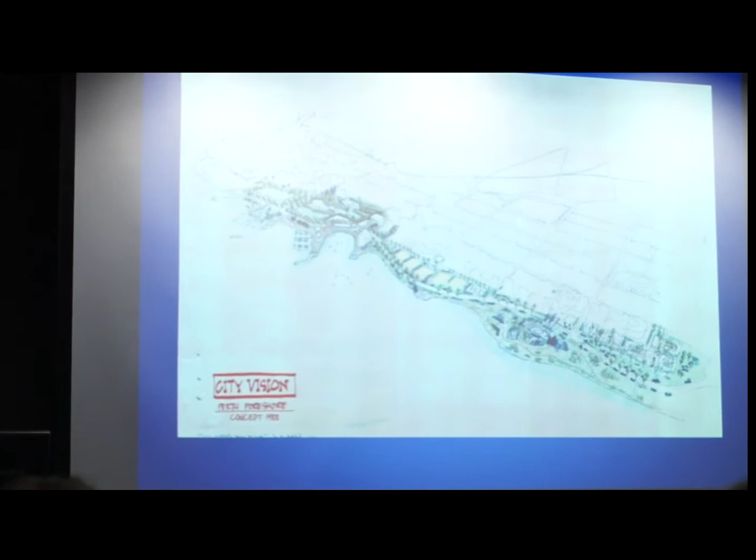I should say that I'm not here as an advocate of the current government scheme, because City Vision's been around for a long time and started the idea of doing something on the foreshore way back in 1988. Now, you may not like that, but one of the things we were involved in was the idea that the foreshore may have some development.

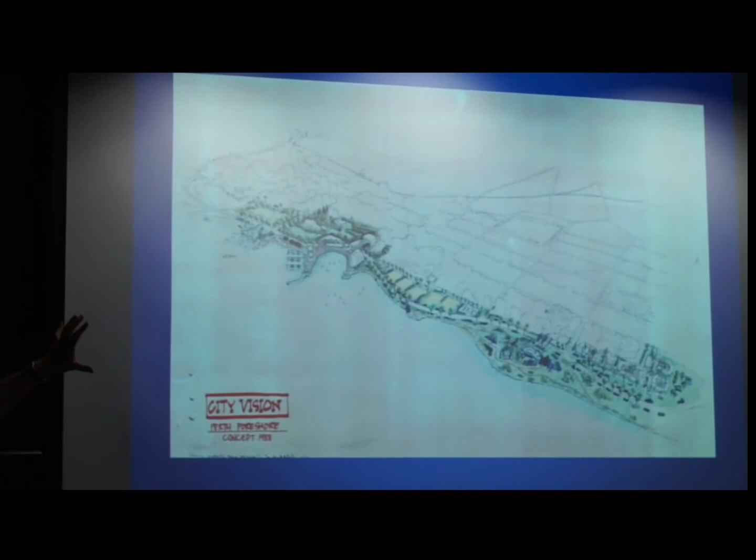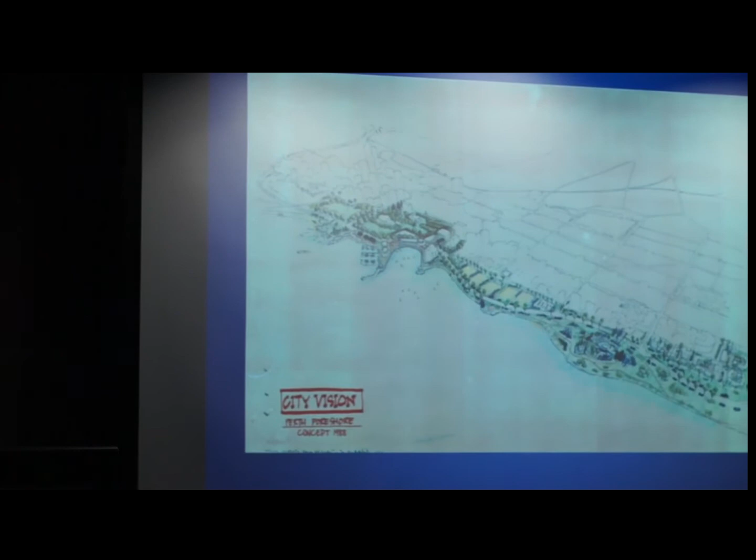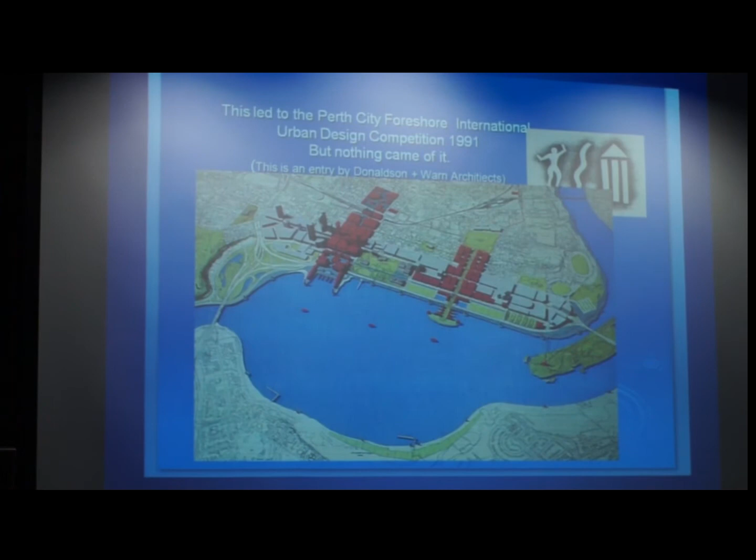Not potential for commercial development, but for public use and civic uses of one sort or another. That was in 1988, which led in 1991 to an international competition run by the Perth City Council. This is one of the entries, only one of many. The idea of building out into the water from the central city started to take effect way back over 20 years ago.

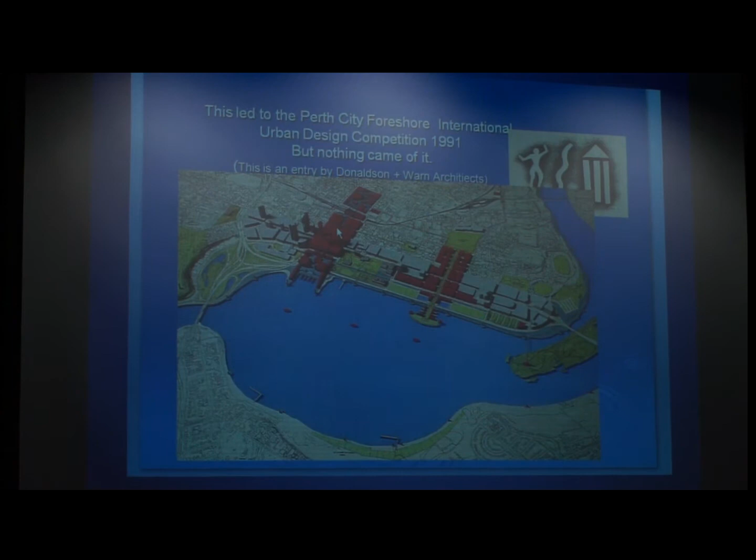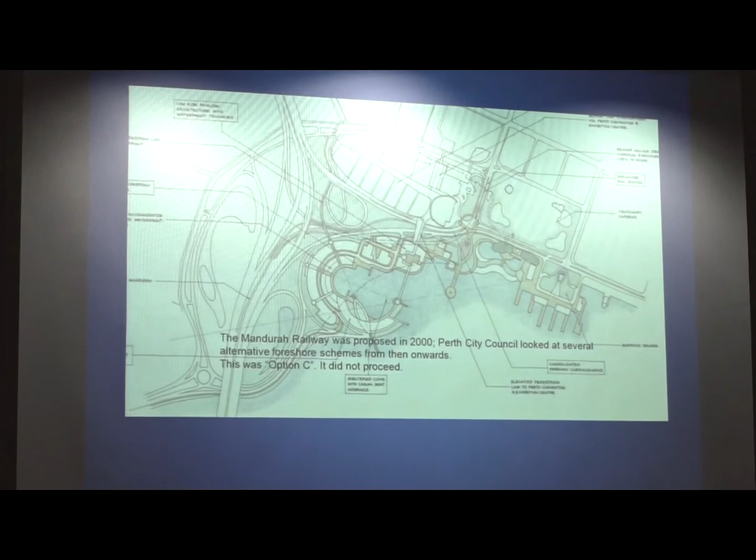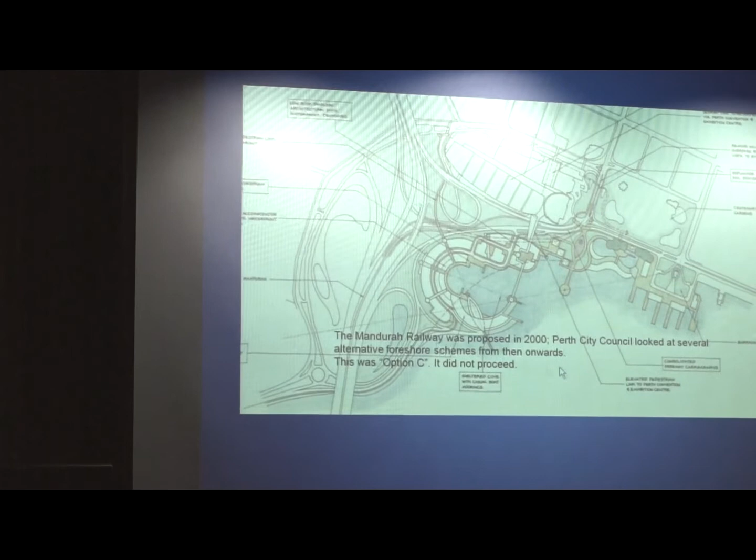We started to think, well, you've got to be careful what you use it for, because something's happened which you may not always care about. The City Council itself then went into looking at the different ideas. This was when the advent of the Mandurah Railway went through the city, and the Perth City Council started to look at all sorts of different development ideas for the foreshore, some of which, this was only one of several, of many.

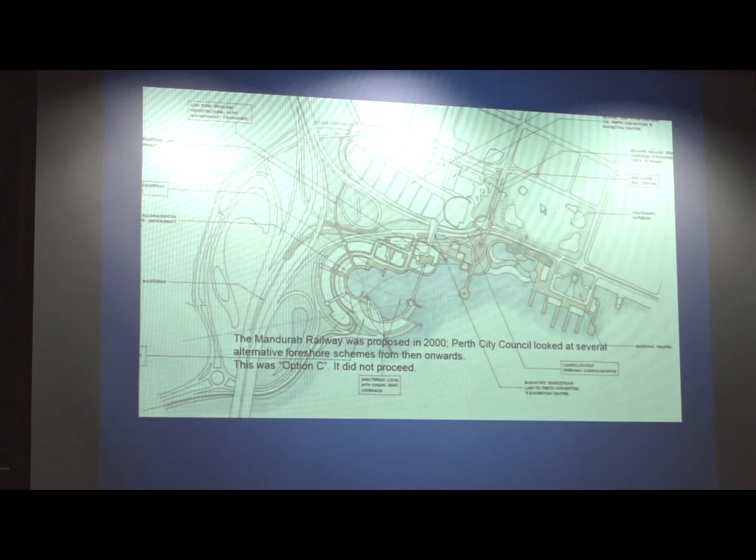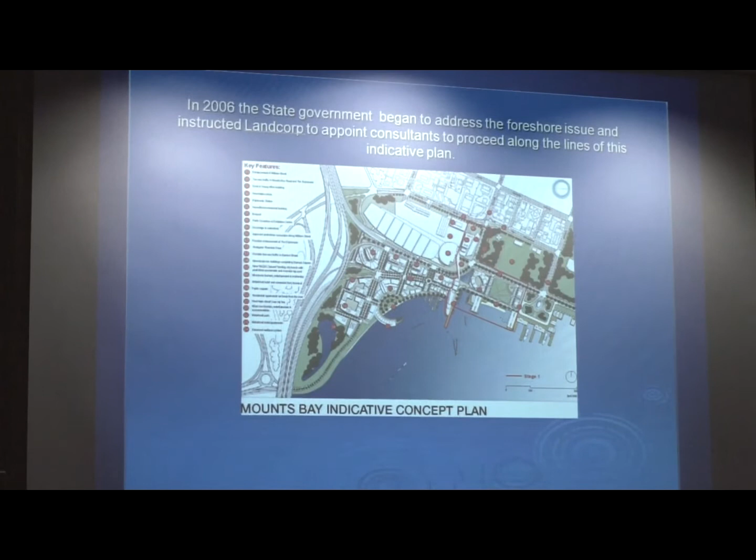But you could see that they kept the Esplanade Park and the Riverside Drive intact. That led later on to the state government taking an interest and beginning to address the issue. They then developed this sort of guideline plan, an indicative concept plan under Landcorp, and they also kept the Esplanade more or less intact and started building out here as well, in front of the convention centre.

That in turn led to, in 2007, what they called a peer group. Various architects and planners were brought together to develop a sort of guideline scheme again, and that also kept the Esplanade, started to build out along here, and had no development out here.

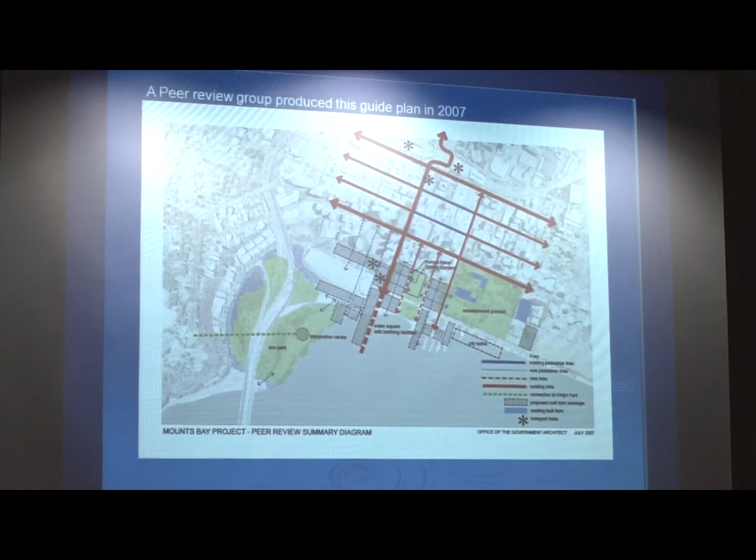And then the government engaged consultants who completely ignored all of that, came up with this plan, which you may remember a few years ago, the sort of 'Dubai on the Swan.' And there's the Swan. And they literally dug up the Esplanade.

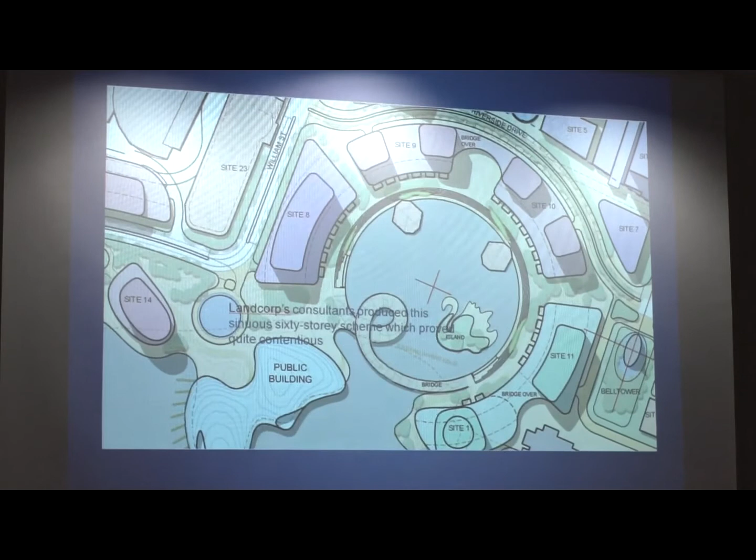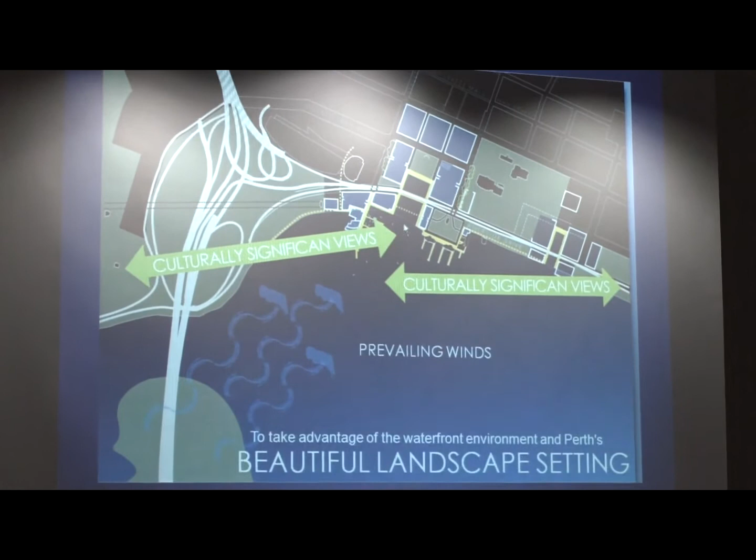Now, we at City Vision were all the time trying to develop some ideas and some principles, and we thought that some of the principles that should be followed would be to do with respecting the Kings Park view, the landscape, Mounts Bay, the Esplanade Park and the foreshore, and also recognising the strong southerly winds coming right into that inlet. Here's the wind rose from that area.

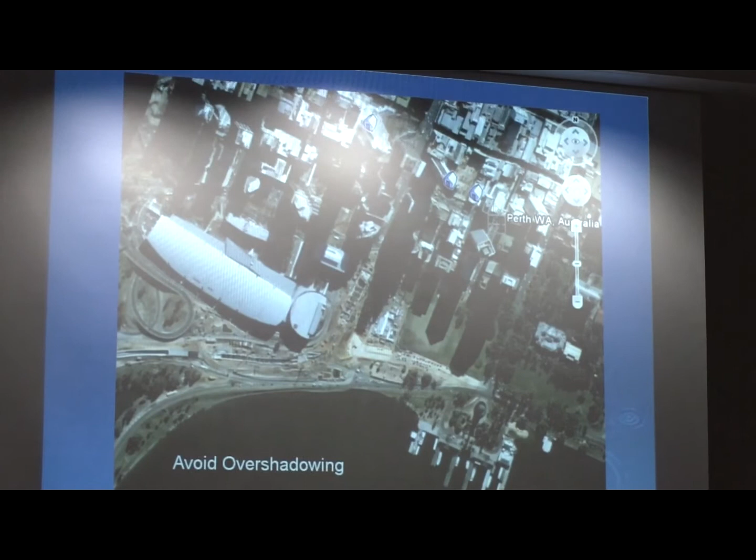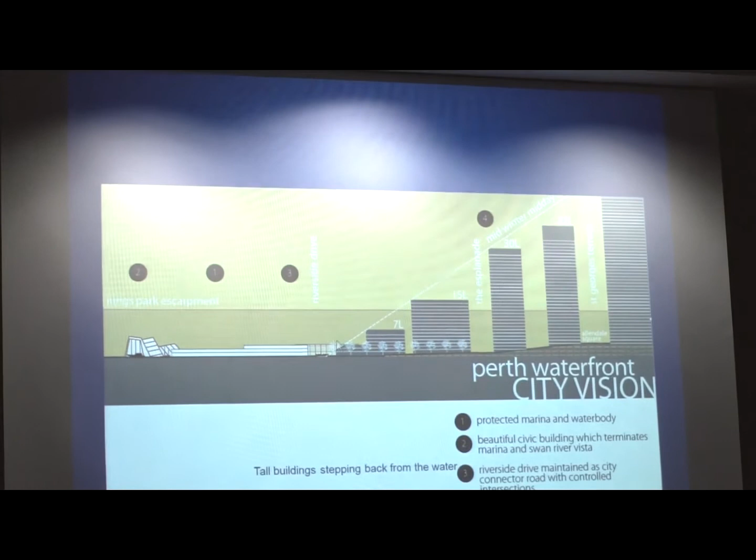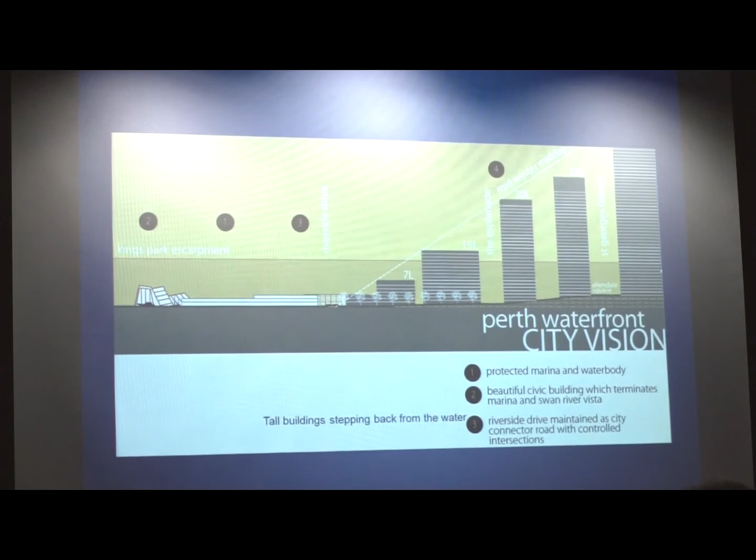So you should be setting the buildings back under a line which represents the winter sun, the lowest sun in winter, so they won't overshadow anything. And City Vision came up with a plan, which you may or may not like.

That attracted the attention of the new government, and we were asked to come and talk to Mr. Barnett and Mr. Day about our ideas.

We continued with the idea of not closing Riverside Drive and retaining a fair proportion of the Esplanade Park, not building over here. And if you're going to do this, do it with a little bit of care.

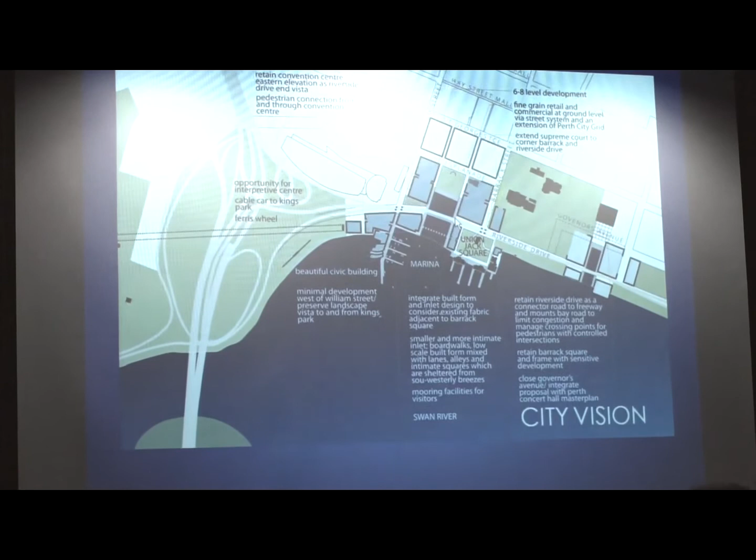But they again came up with it - they used the same architects who came up with a new version of the plan we showed before, but instead of circular buildings, they're now square. And they now look like this. This was published in the paper not long ago, a couple of weeks ago.

Yeah, so we've got some really - that's the site over here.

Now the big issue I've been asked to talk about tonight particularly is the question of access, traffic and access. Now that's the Northbridge Link, that's the East Perth Extension Gateway thing, and this is the scheme we're looking at now on the waterfront.

There's 645,000 square metres of new office space going into those big buildings, and so many thousand people will come in, and the traffic and public transport system will be under enormous stress with all those new developments there.

Now, the government does have schemes for improving public transport, but at the same time they're going to be cutting Riverside Drive, and the public transport will be under enormous stress. So that's an issue.

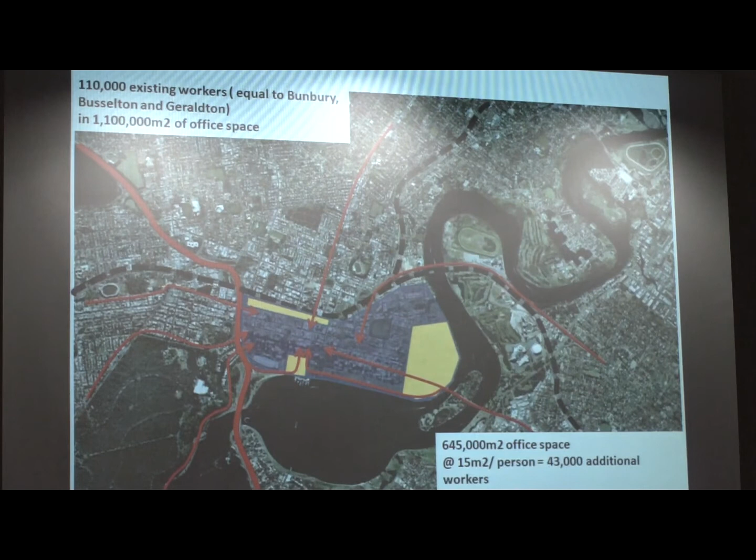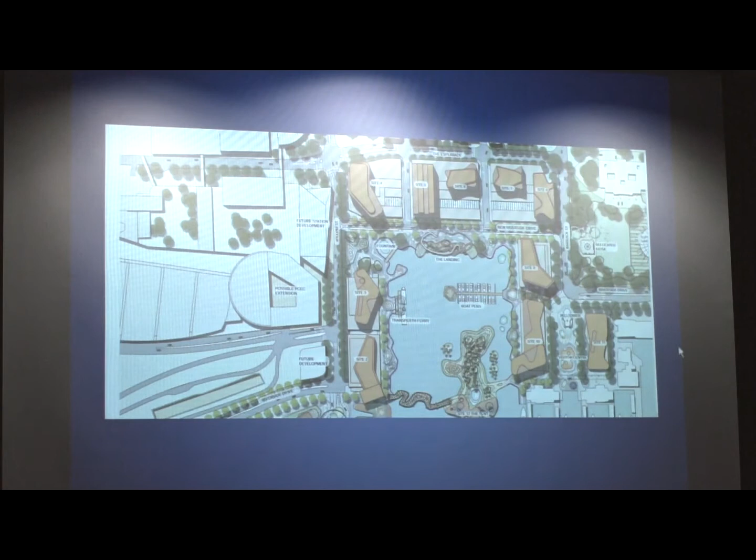Now we can see here these tall buildings - these are schematic buildings that the government architects and planners have put up. They have big decks of car parking under here, and these big buildings cut the road across there, so you'll have to drive around that way to get around. And those yellow blocks are development blocks, and there's the new inlet.

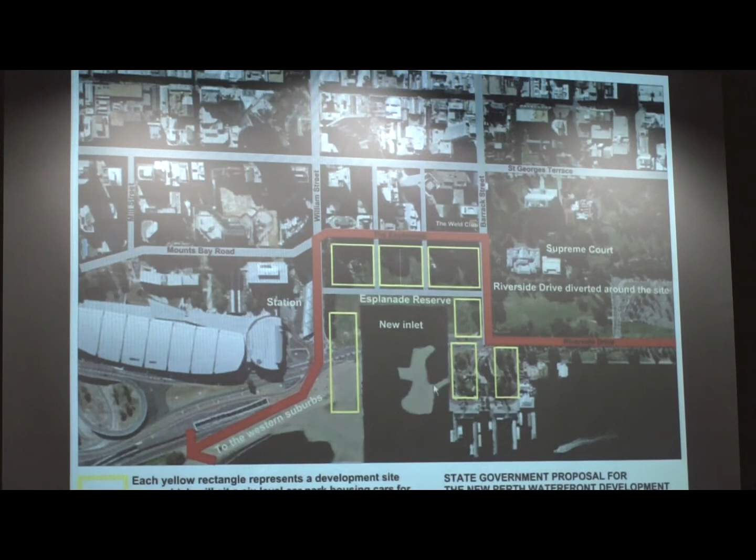Now, in terms of traffic and movement, the whole of the city must be seen in a way as an organic organism. It moves, and people have to move across it, whether by public or private transport. This is a key link across from east to west, and also from north across to northwest to southeast, people coming in this way and going that way, right across.

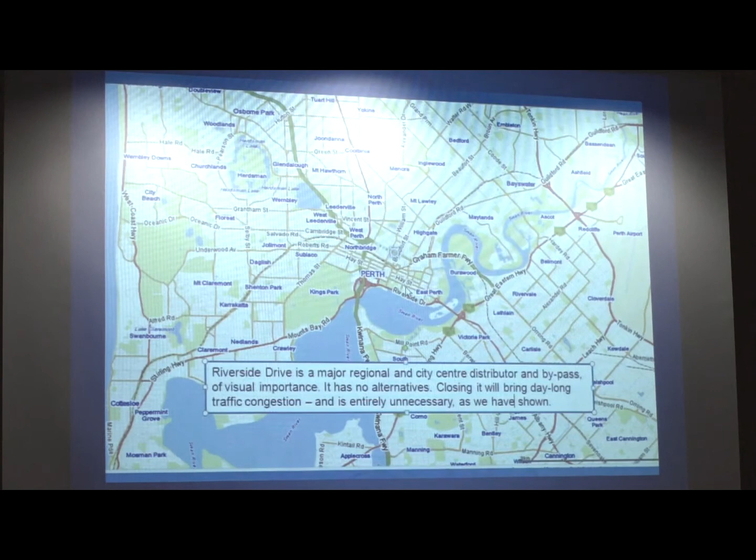And Riverside Drive itself has no real alternative. What will happen if it's cut will be the forcing, if you like, of traffic both into the CBD and around its periphery. So instead of improving traffic flow, we'll have more and more land use, more development on the waterfront site, attracting more people to that location, and we're actually slowing down and diminishing your access.

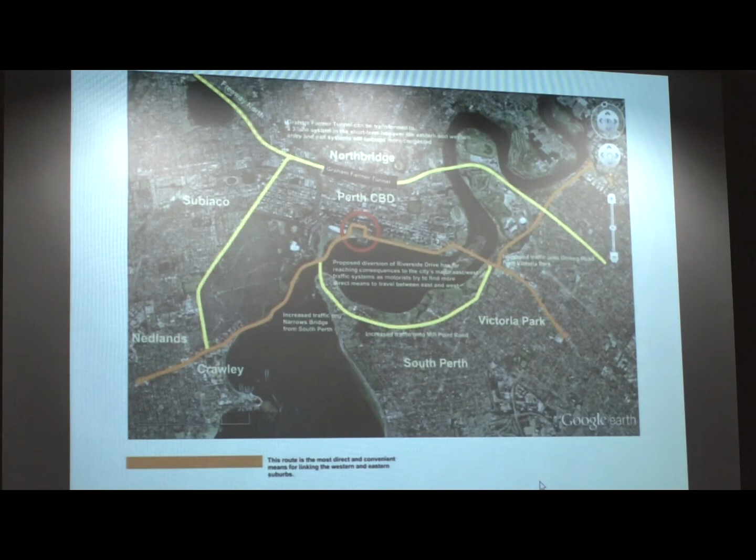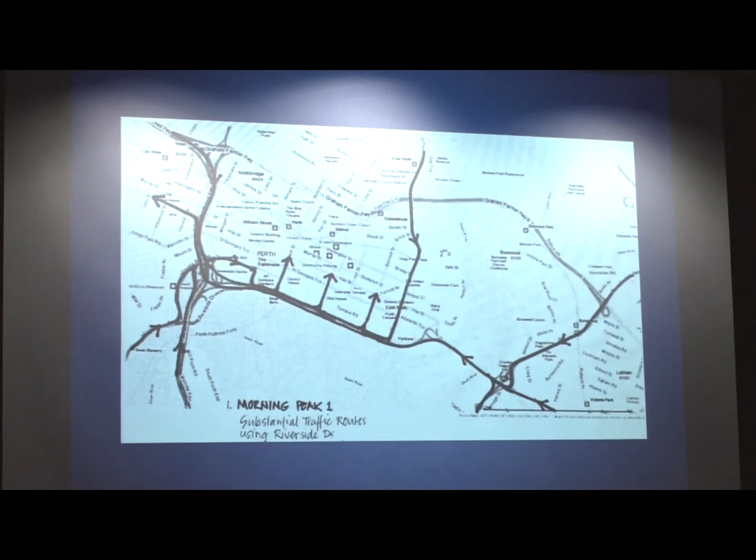Just as an idea, this is just looking at, say, morning peak movements from east to west. Riverside Drive allows people to come down off the freeway and up into this part of East Perth, at the east end of the CBD, or along this way and up into West Perth and what have you.

And if you cut it, you're going to have them wending their way through the park and into the new tunnel, which is going to be widened, but you've still got to get out of the exits, which are clogged, and into West Perth and so on, or into the already narrowed streets of the central area. You could use these little diagrams to look at all different aspects of east-west and north-south traffic. It's just going to be a quagmire.

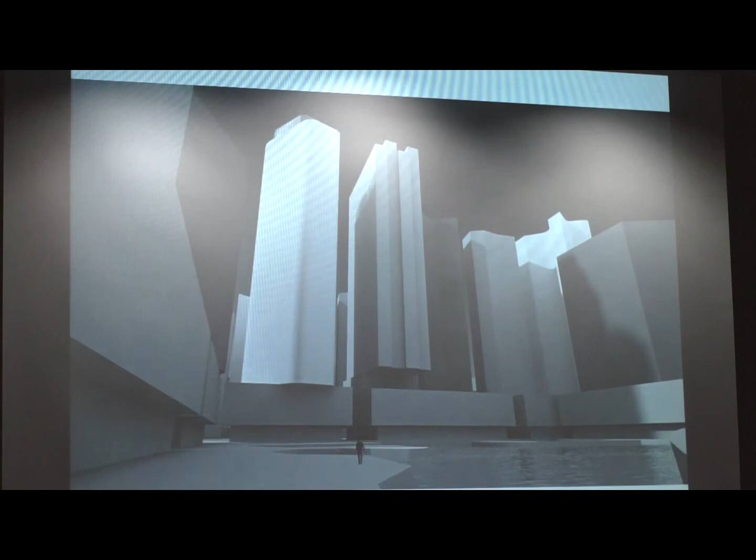Now this was done by some people working for the City Gatekeepers group, just showing the volume of those buildings. We don't need big buildings in order to get an attractive waterfront, an exciting place to sit and drink coffee and what have you. These are an alternative plan produced by the City Gatekeepers, and I advise you, if you're interested in this issue, to look at the City Gatekeepers site.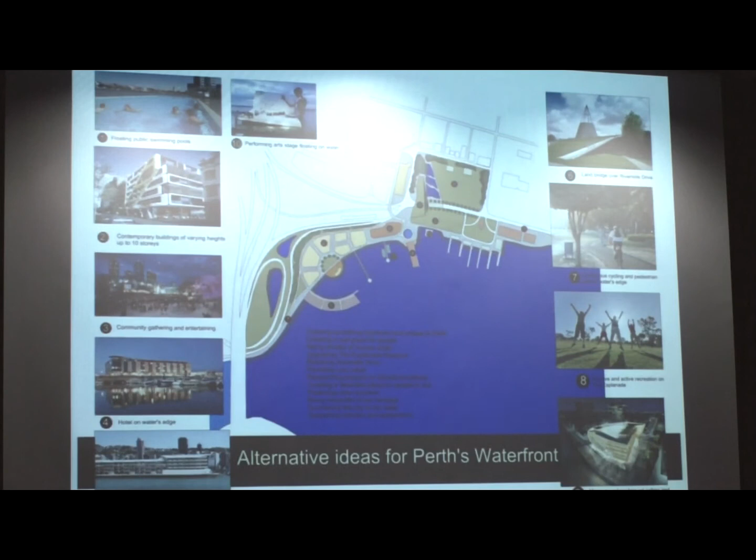This is a new plan produced by City Vision. It shows you a much softer development, still keeping a fair whack of the Esplanade, some of the heritage buildings, much lower and less dense buildings, and many more public buildings. You know, you're giving up a lot of public land here - why don't we have civic developments?

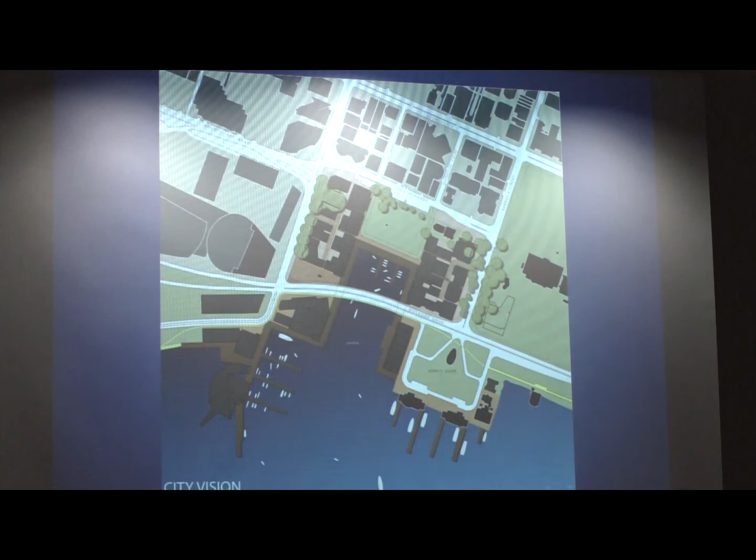Whatever these may represent - a new museum, a new lyric theatre, all sorts of uses of that sort - which in a way have a call on public space, which private and commercial development doesn't have.

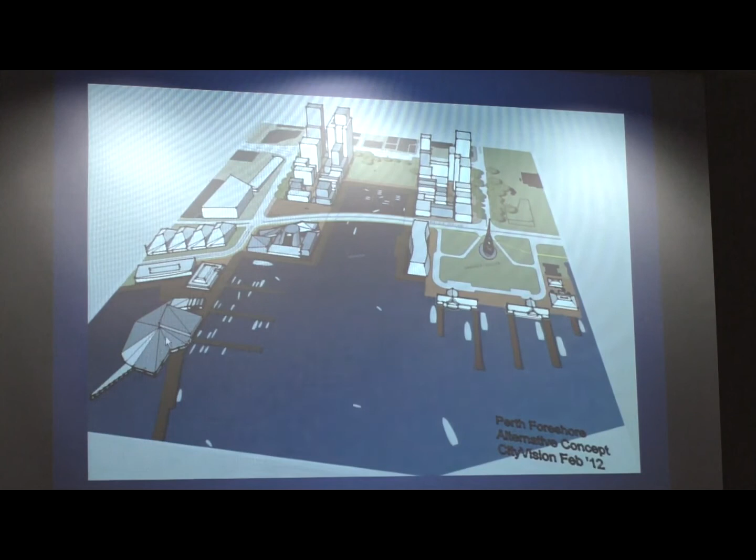There we are, I've come to the end - good timing. And here's just a view, a three-dimensional view, showing perhaps a hotel, with some buildings stepped back, and public use here, maybe one sort or another. But that's my talk.